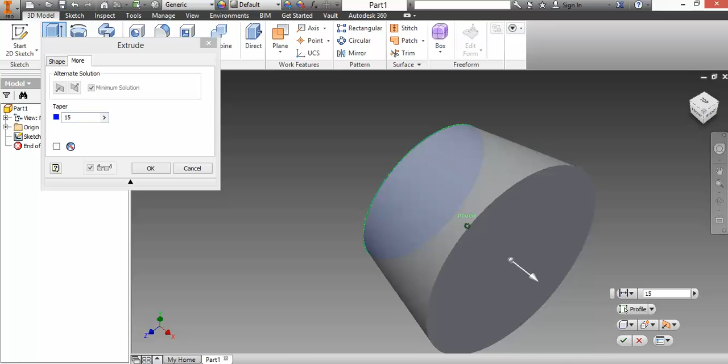This goes by degrees. Notice now that this is at a 15-degree angle, so it's going to extrude out at an angle. It's telling us the angle is 15 degrees. If I wanted to make it smaller, it goes negative, becoming a smaller angle. It's coming in now at 15 degrees, and so forth. I can change it.

There's 25, get rid of the negative, but you can do a lot of things with the extrusion, and it's going to extrude at whatever shape we decide to make it.

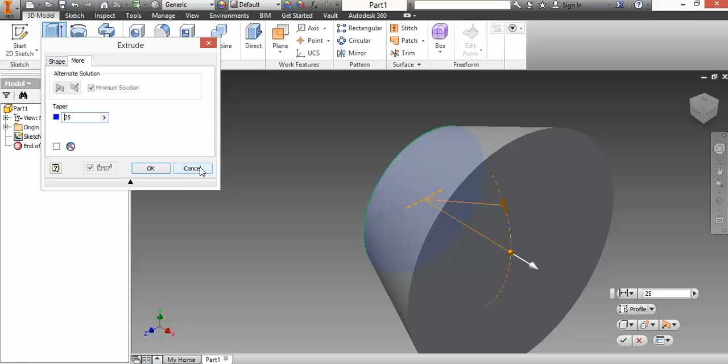For example, if I were to go back to my sketch and get rid of this shape, and I wanted to do, let's just do a polygon, a 6-sided polygon. So, let's try this again.

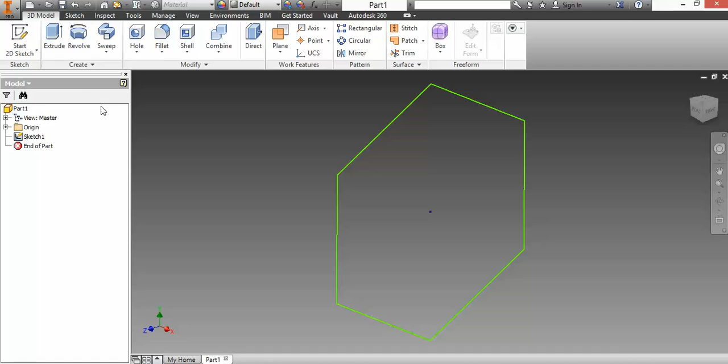So here's my polygon, finishing it here, and I get ready to extrude it. If I go up here to more again, there it's going to extrude it whatever shape I have there. I just wanted to show that to you guys. Alright, so that right there—what the heck, let's just go ahead and keep that.

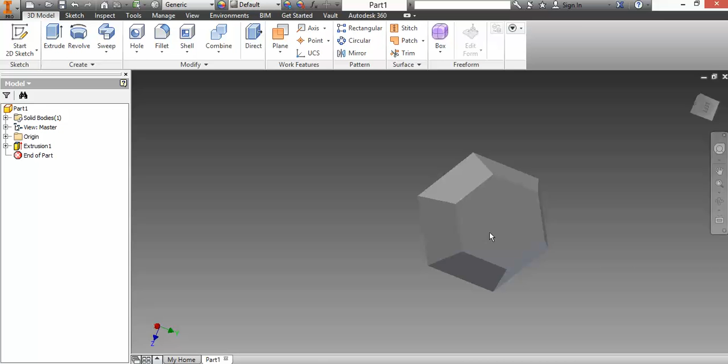Now the next thing I want to show you guys—so we did the extrusion—how about an extrusion from a midplane? Let's come up here to my origin, and I have these different planes that I can turn on here. What I'm going to want is one that kind of runs through the middle here. Okay, that one would be on top. This is the one I'm wanting.

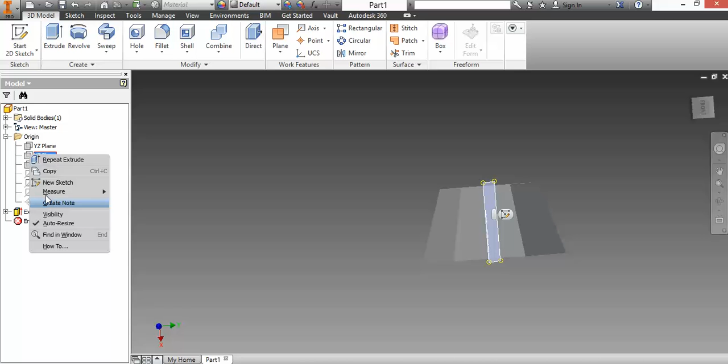So I'm going to go ahead and right hand click on it, make it visible. Now I've got that one right in the middle of it. So what I can do is go here—I want to make a sketch on that one. And let's say I wanted to...

I don't know, let's say that we wanted to make some eyeballs popping out of it. So we're going to make another circle. Well, some of you might be saying, well, I can't see the circle—how am I going to do anything with it? Well, let me show you a little thing here.

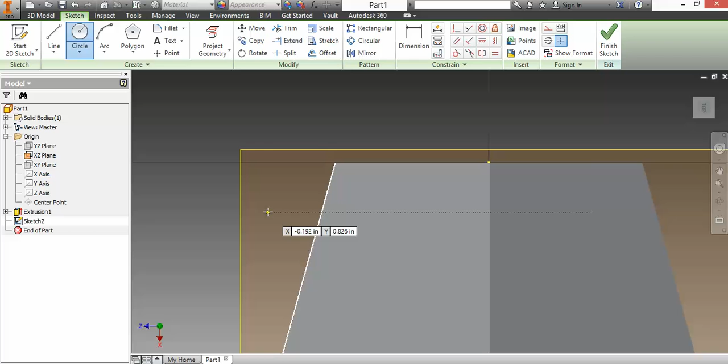I'm going to right hand click and say OK, and then I'm going to right hand click, go down to here, a thing called Slice Graphics. What that does is it gets rid of the front half of that, so I can now see my circles that I've drawn on there. It's still there, it's just like making it invisible so that we can see on this plane the circles I've had.

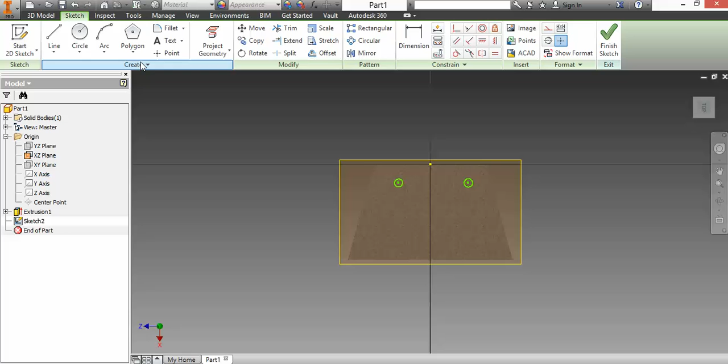Another little trick I'm going to show you here is, I've shown you this before, project geometry. By coming around here and clicking on these, now the edges of this are also on the sketch. I could measure from those edges—not that I want to do that right now.

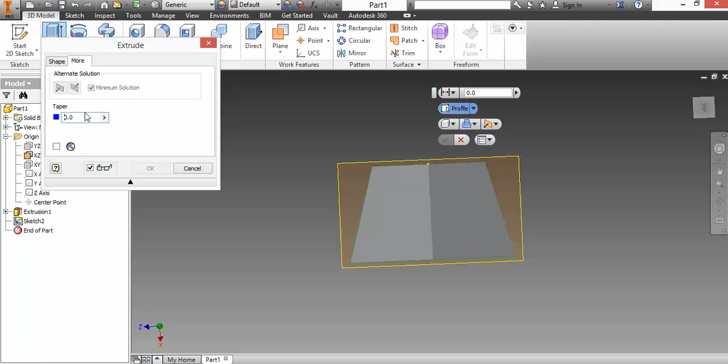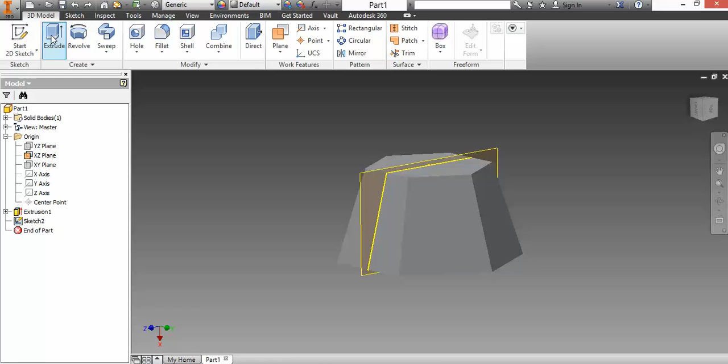I'm going to go to extrude, and I'm going to go more. I'm just having fun with it now. I've clicked on both of those. Let's hit OK. Didn't quite do what I wanted it to do here. Let's backtrack, go to extrude again.

There we go, had to zoom in there a little bit. And now I've got these pegs sticking out of there.

So at any rate, we've shown you extruding, tapered, midplane. Let's talk about drilling some holes.

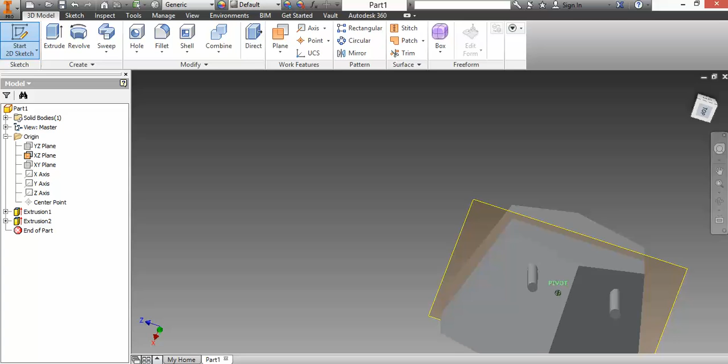Alright, back to Inventor. I'm going to make a new sketch.

Let's say I wanted on the top of this, a hole going through the middle of it. Sometimes we can drill, sometimes we've learned to extrude holes, but we can also simply put multiple work points on here, and you'll see why in a second. Let's say these are the holes.

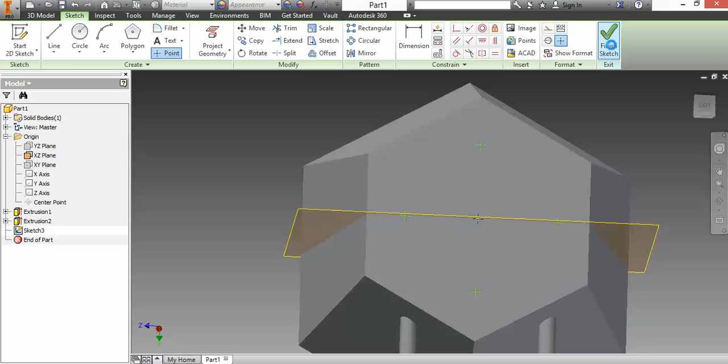Now I haven't dimensioned these, and that's okay for right now. You guys would probably have dimensions you'd have to put on it. But here's my hole, and what this does now is I can go through here and tell it that I want to drill. This is like drilling a hole, like what a drill would actually do.

Over here you've got the different types. This is a non-countersunk or counter bore. This is actually a countersink when it goes at a taper right here. These two here would be called counter bores.

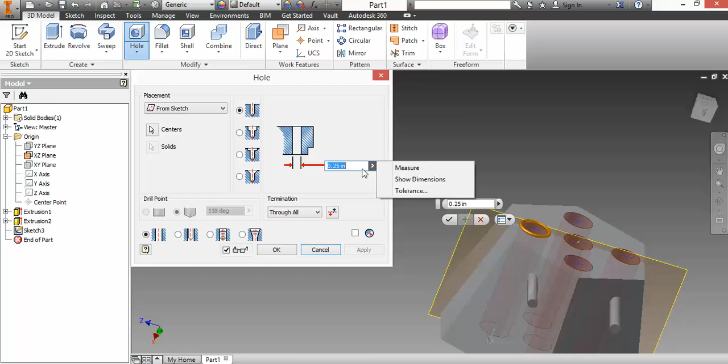But let's say I wanted to drill a hole that had no countersink or no counter bore. I want the hole to be 0.5. Now it's saying that all the holes right now are going to be that big, but I don't want all the holes to be that big.

And I only want it to go a distance, let's say 0.25 inches. And on top of that now, I want it to finish at a flat. It's going to be flat on the bottom.

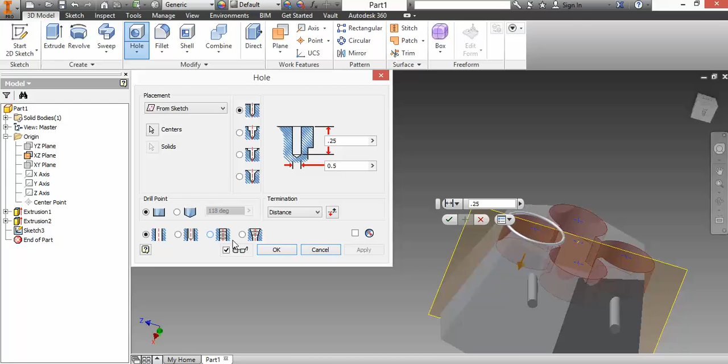And I do want it to have some threads. A lot of times, most times you're not going to do anything with your threads because it's going to be automatic. It automatically puts them in there.

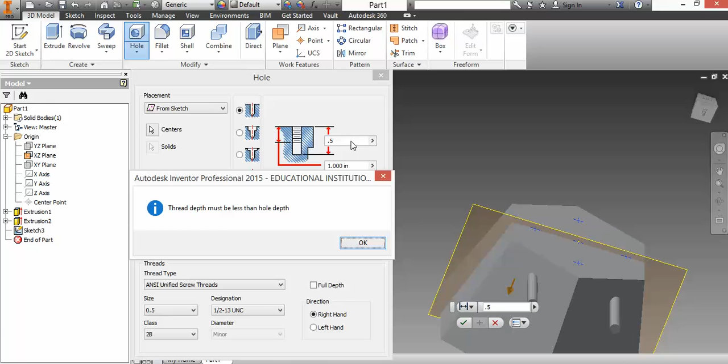Let's see if this will let me change this again. Alright, we're going to thread it all the way through.

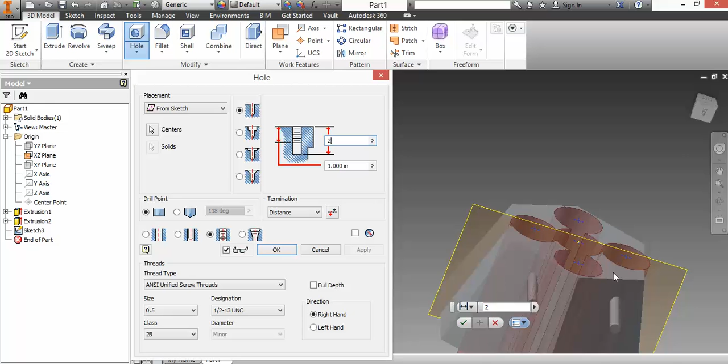Alright, now I'm going to go over here, and I believe now if I say OK, it's going to drill all those holes, and they're all threaded all the way through there. But let's back up a stage.

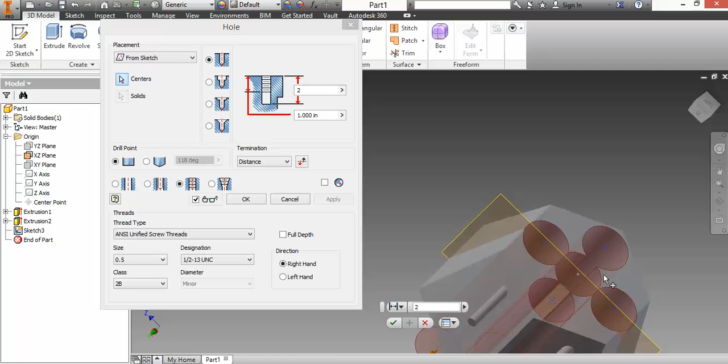Alright, hole, there we go. Let's say I just wanted to do one hole. What I needed to do here, I'm going to backtrack here again. Notice they're all green, okay, I'm going to zoom in.

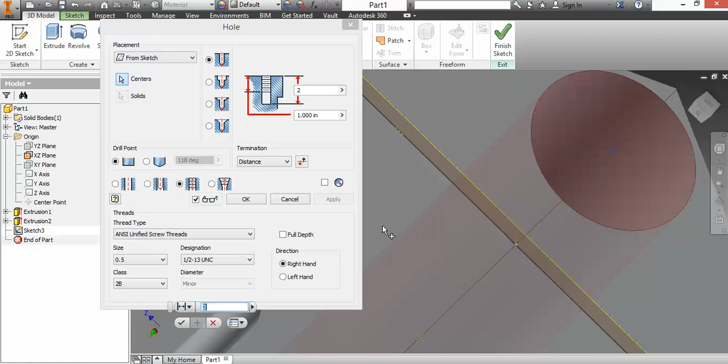I'm going to click on that one. So now that I've made it blue, I can now go in here and only drill that hole. That was the key concept here that I went to.

If you zoom in on it, alright, notice now this one, my middle one here, is going to be blue. And again, if I wanted to drill a hole, maybe this one I wanted to be tapered, or I have a counter bore at the top, I'm going to leave the counter bore as it is. I'm going to leave everything alone.

Counter bore must be greater than 2 inches. It's not liking something here that I'm trying to do. Okay, that's bigger, that's smaller, 2 inches depth here.

Counter bore, let's make the counter bore here at the top real small. I think that's what's causing the trouble. And let's make it just non-drilled.

It is greater up here. Counter bore diameter must be greater than the hole diameter. Okay.

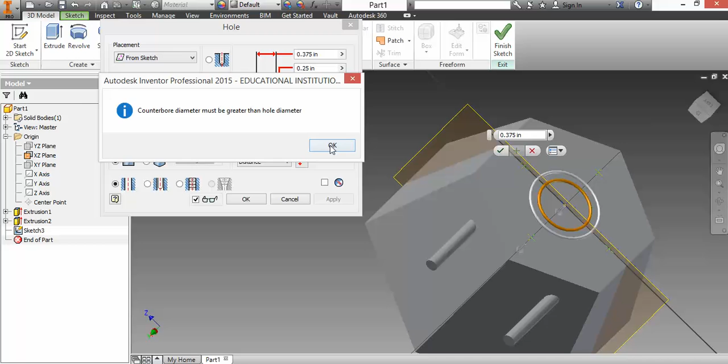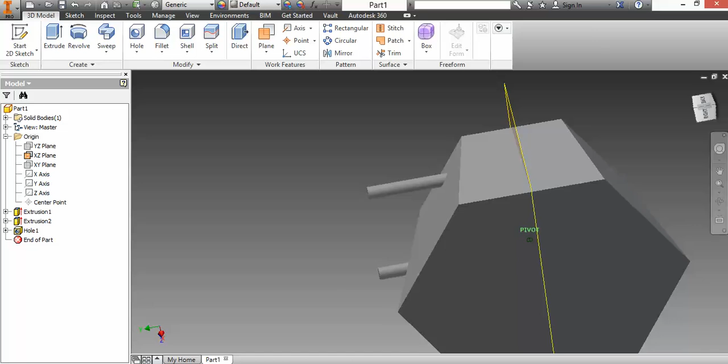Ah, down here, there's my problem. I'm going to make this 0.25. And now you can see that there is a counter bore in there, and it doesn't go all the way through.

Alright, so let's see what we've shown you here, and some work planes, and a lot of that was reviewed with the work planes. So for right now, that's going to be it for today. I'll catch you guys on the flip side.